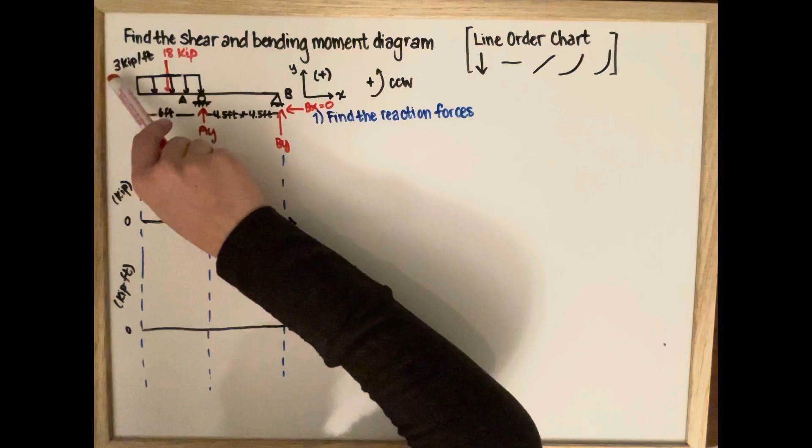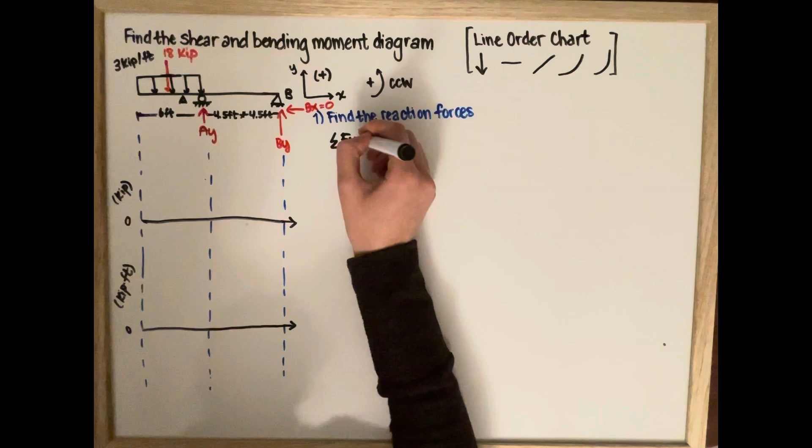The second step is to calculate the concentrated force for this uniformly distributed load. 3 kip per foot times 6 equals 18 kip. The next step is to find the reaction forces. We're going to sum the forces in the y direction. We have negative 18 kip plus AY plus BY equals 0. Since we have two unknown reaction forces, we need a second equation.

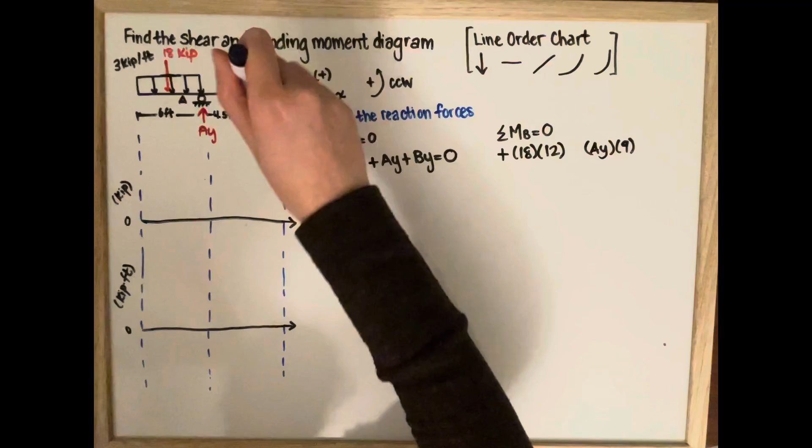So we're going to sum the moments about point B. The first term is 18 kip, and the distance is going to be 9 plus 3, half of 6, which is going to be 12. Since this is going in the counterclockwise direction, this term is going to be positive. Next, we have AY times the distance to B, which is 9 feet. Because this is going in the clockwise direction, we're going to have a negative term, equal to 0. And AY equals 24 kip.

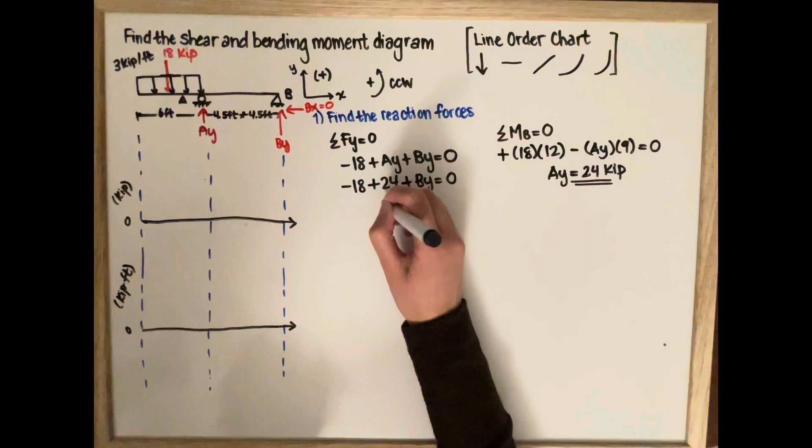We're going to use this value to determine BY. Negative 18 plus 24 plus BY equals 0. BY equals negative 6 kip. This negative value indicates that the direction we've assumed for BY is incorrect and it should be in the opposite direction. Now that we have the reaction forces, we can draw the shear force diagram.

We're going to start at 0. And since this is a concentrated force, which is a value of 18, we're going to go from 0 to negative 18. Because it's a uniformly distributed load and it has a horizontal line, we're going to go to our line order chart and see that the next line is going to be sloped. So it's going to be this shape. And there is an AY value here, which is positive 24. So we're going to go up 24. It's going to give us a value of 6.

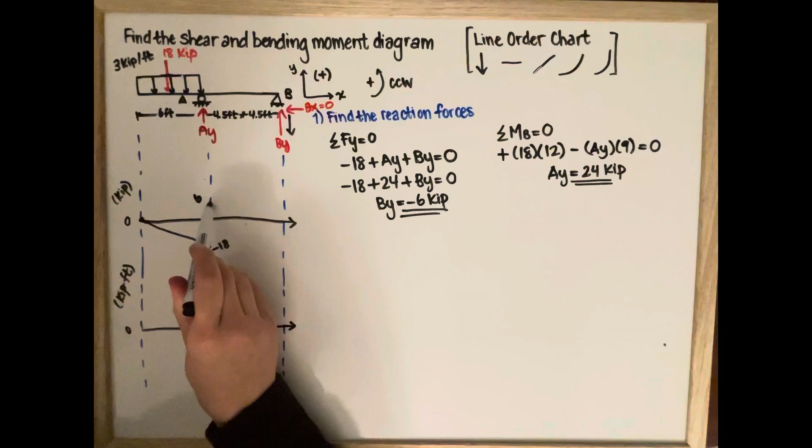There are no external forces, so it's going to be constant. And B is going to be negative 6, so we're going to go down. And that's the shear force diagram. The next step is to calculate the areas, A1 and A2. So A1 is going to be 1/2 base times height. Our base is 6 feet, and our height is 18, and the value is going to be 54. We're going to do a similar calculation for A2, which is going to be 54.

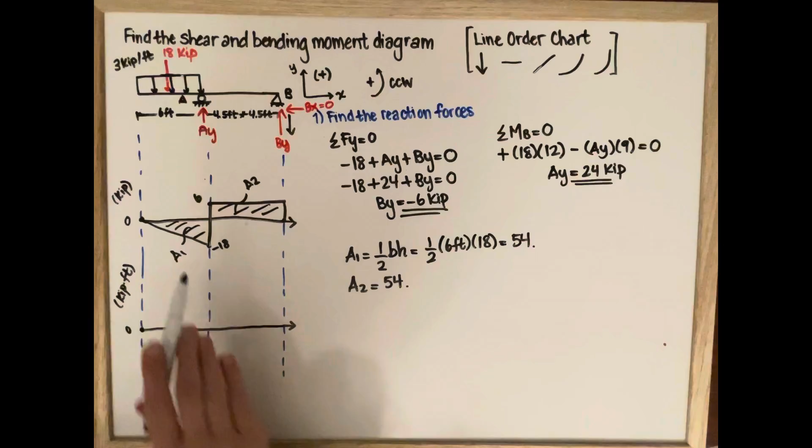And now we can draw a bending moment diagram. We're going to start with 0. Since this is below 0, we're going to have a negative value. So negative 54. Because this is a sloped line, we're going to have a parabolic shape. And we can have this shape or this shape.

Because we have a larger shear at this point when compared to this point, the slope at this point must be greater than this point. So the slope of this line right over here is 0 here, and it's steep here. Therefore, we know that that is the correct shape.

Next, negative 54 plus 54 is going to be 0. Because this is above 0, positive, and we have a uniform shape here, which is a horizontal line, this next line is going to be sloped, and we're going to connect this. And this is the bending moment diagram.